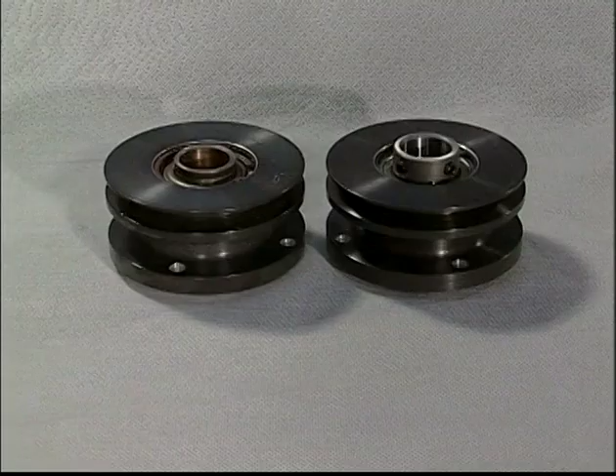Note, Rotorway International has two designs of the fan pulley assembly. Be sure to identify for the parts department which bearing you will need. For bearing replacement, do the following. Before removing the fan from the hub, make an index mark on the fan and the hub.

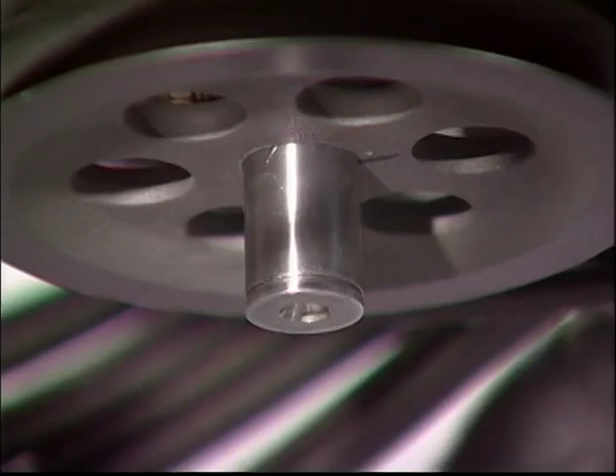Remove the lower snap ring on the secondary shaft. It will be necessary to use a puller, as the pulley was finally installed to the shaft using Loctite. Important, inspect the secondary shaft for any sign of wear or damage from the fan pulley bearing. Call customer service if you suspect shaft damage. Remove the two snap rings on each side of the bearing.

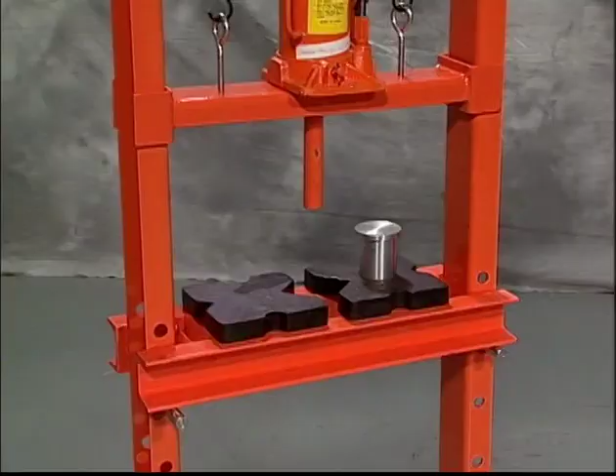Heat the pulley in an oven at 250 to 275 degrees Fahrenheit. Lightly press out the old bearing with a press.

When replacing the bearing, be sure the extended end, or the end with the two set screws, is properly positioned as shown. Clean the pulley's inner surface with acetone and then clean the new bearing. Insert the snap ring into the pulley groove and make sure it is seated.

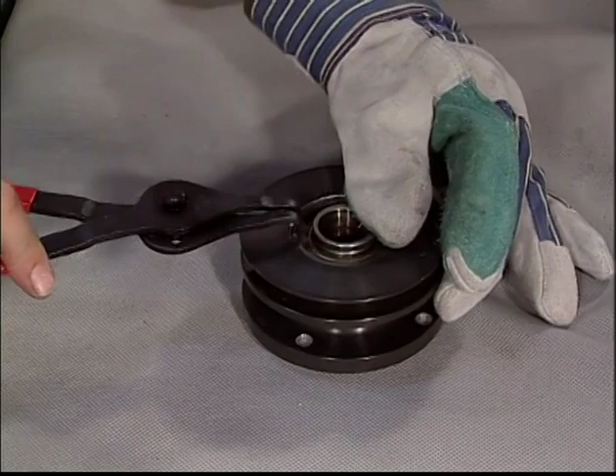Again, reheat the pulley to 250 to 275 degrees Fahrenheit. The bearing should drop into place, or lightly press into position if necessary, until the bearing contacts and sits against the snap ring. Replace the second snap ring in the pulley and let air cool. Deburr the snap ring groove on the secondary shaft.

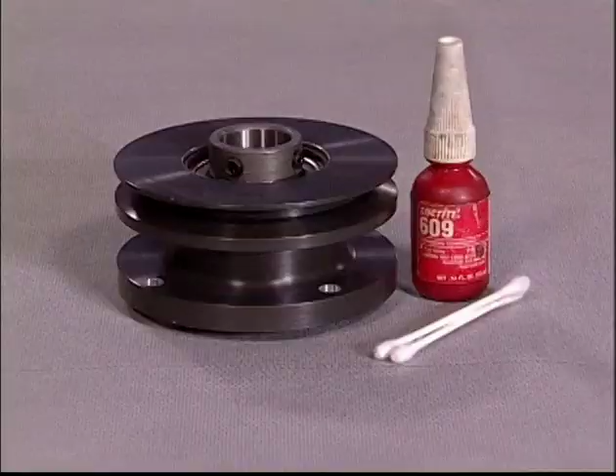Check for close tolerance fit of the fan pulley bearing against the secondary shaft. Note, use Loctite 609 upon final assembly of this part to the secondary shaft assembly.

At the 500-hour service, the main drive belts, along with the alternator, water pump, and the upper and lower fan drive belts, need to be changed out. Changing the alternator belt and upper fan drive belt requires removal of the secondary from the square tubes of the airframe. Before removing the secondary, remove the rear oil bath seal as shown in the 100-hour maintenance video series, Tape 2. Note the oil bath's lower pan has been removed during this portion of the video for a better view of this procedure.

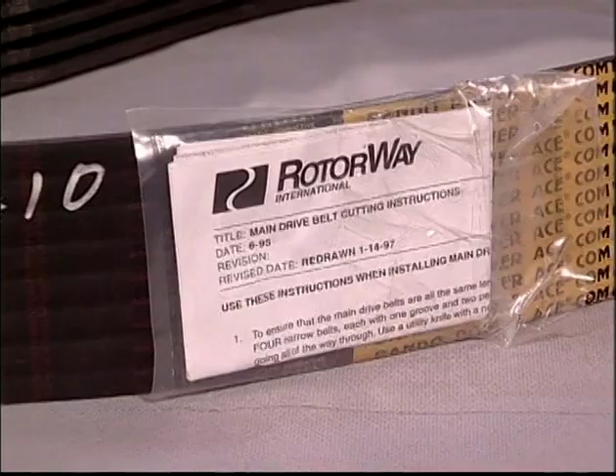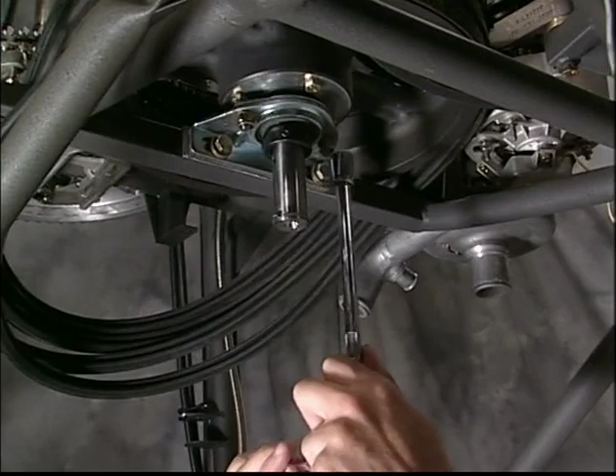Refer to the instructions accompanying the new main drive belts and prepare them for installation. Be sure and clean the belts thoroughly before installation. Loosen the belts of the alternator and fan drive. Remove the fan countershaft drive assembly from the airframe. Remove the lock nuts of the secondary's lower bearing flange.

Remove the bolts that secure the flange to the frame, keeping the shims and the flange together. Remove the bolts of the upper bearing assembly and remove the secondary from the airframe. Keep the shims together.

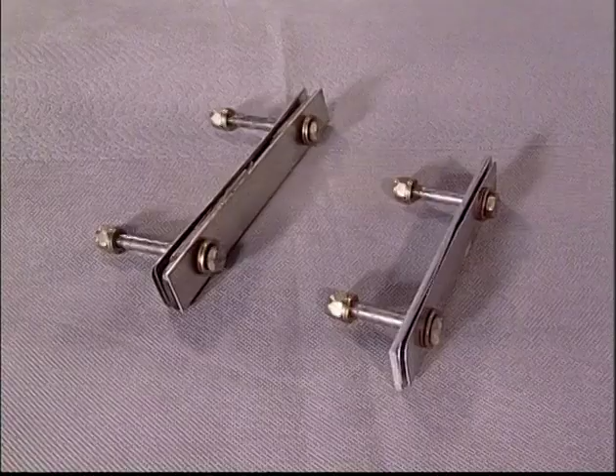Note, it is very important, maintain the order and number of shims for the bearing assemblies. Inspect the condition of the secondary pulley. Clean any grease and dirt from the top surface of the upper bearing. Replace the bearing temperature strip if faded or damaged from moisture and age. Warning, do not tamper with the secondary unit. This is a factory serviceable unit only.

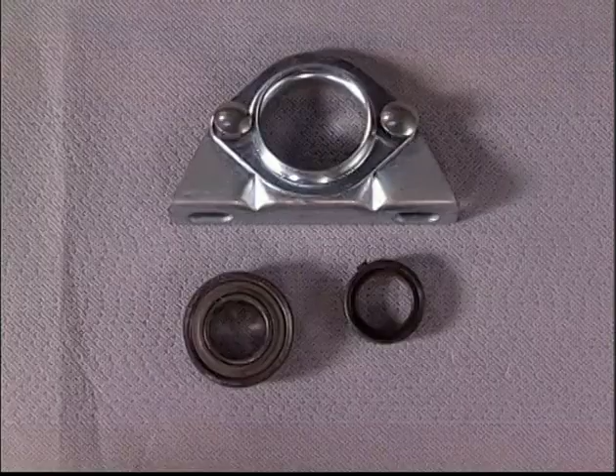Replace the lower secondary bearing assembly. Replace the fan drive shaft bearings. Replace the idler pulley bearing. Heat the idler pulley bearing in an oven, as demonstrated with other bearing replacement procedures. After new bearing installation, always verify that the bearing was installed correctly by rotating the pulley or bearing on the shaft and check that it turns smooth and its alignment is correct.

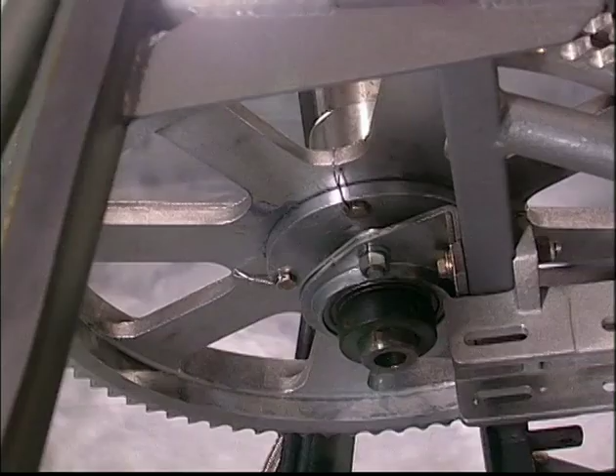The lower main shaft bearing RCO is 500 hours. Also, these four 1/4 inch bolts and the lock nuts need to be replaced at the 500-hour service interval. To replace the 1/4 inch bolts on the main sprocket, it may be possible to raise the sprocket up the shaft to access the bolt heads as shown.

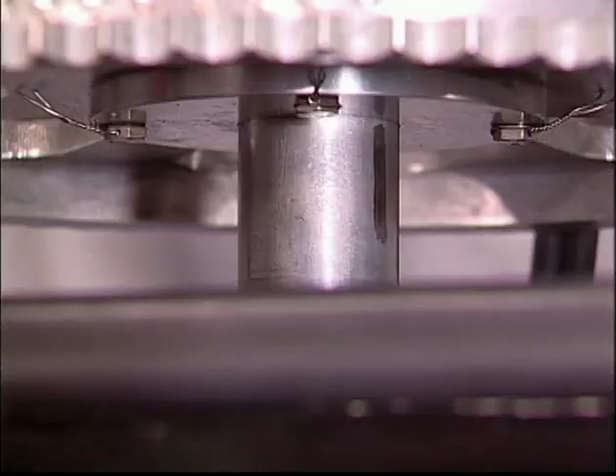To replace the lower main bearing, refer to the steps shown next during the main shaft raising or removal procedures. Note, it is not necessary to raise or remove the shaft to change the lower bearing. Should you find it necessary, it is also possible to raise or remove the main shaft without disturbing the rigging of the swash plate. Proceed as follows.

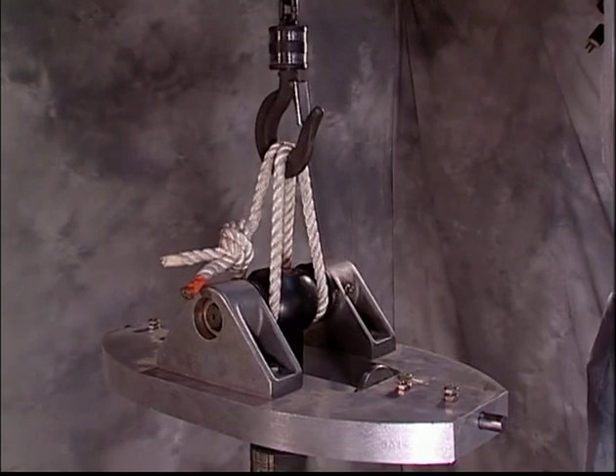Level the main shaft fore and aft, using blocks of wood under the skids. Then use a hoist to support the weight of the shaft before servicing the lower main shaft bearing. Adjust so there is a slight lifting tension. Loosen the four 3/8 inch bolts securing the main thrust bearing flanges to the hood bracket, approximately one full turn.

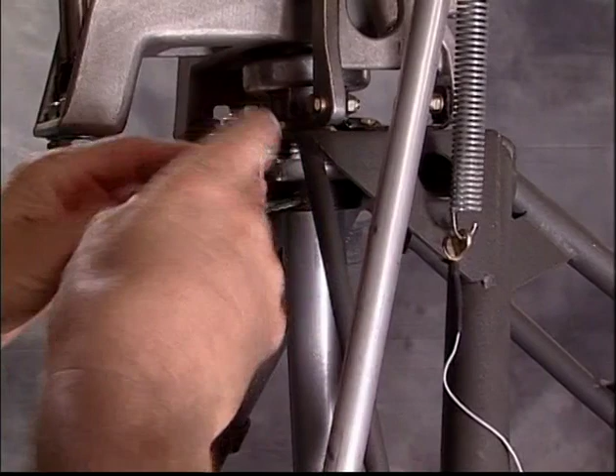Remove the safety spacer and clean the grease from the shaft. Loosen the set screw on the main thrust bearing lock ring and knock the ring loose from the bearing. Deburr the shaft. Make absolutely sure there are no marks or burrs on the shaft. Any burrs could damage the main thrust bearing, or the shaft could jam the bearing, making removal virtually impossible.

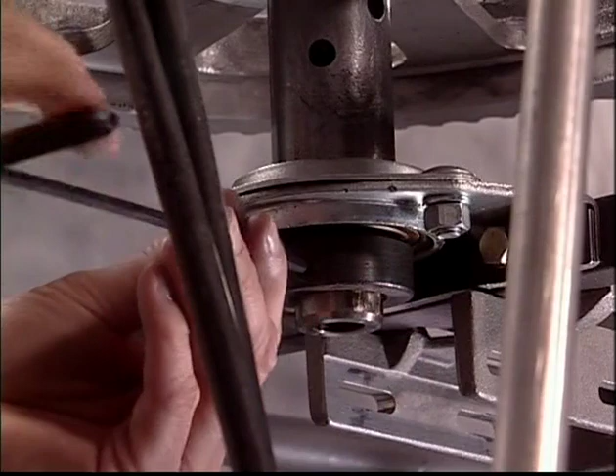Cut the safety wire and remove the 3/8" bolts. Before removing the last bolt, make an index mark on the hub and the shaft. Loosen the set screw on the lower shaft lock ring and knock the ring loose from the bearing and shaft.

Remove the nuts and lock washers from the lower bearing flanges. Remove the bolts that secure the bearing flange and the upper engine mount to the airframe. Allow the shaft and bearing assembly to move away from the airframe slightly to remove the lower flange.

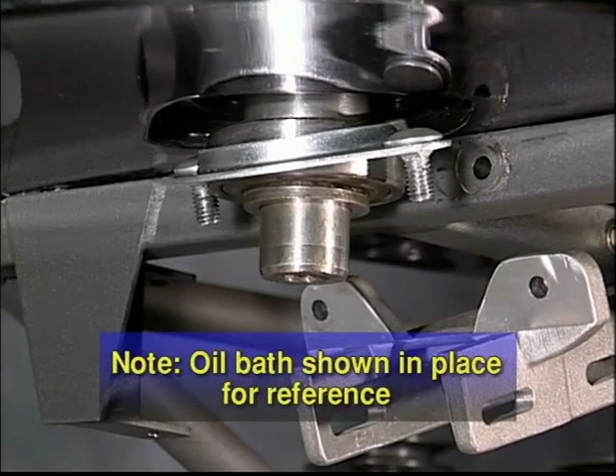Deburr the shaft and clean it with acetone. Now lower the main shaft assembly to move the bearing down and away from the oil bath. Install a puller and apply pressure to the bearing.

Because of the Loctite 609 used on final assembly, it will be necessary to use heat to free the bearing from the shaft. Use caution when applying heat. Only heat the inner race of the bearing. Do not apply heat directly to the shaft. Clean the shaft with acetone.

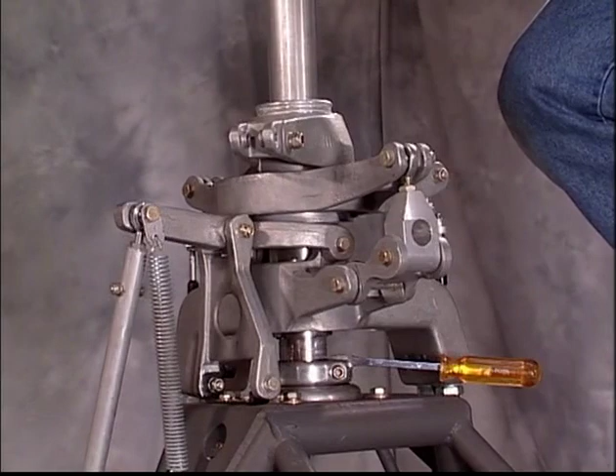These 4 bolts and lock nuts in the large sprocket need to be replaced. The bolts, part number E00-2450, and lock nuts, E00-3410, are included in the 500-hour service kit. Cut the safety wire and remove and replace 1 bolt at a time.

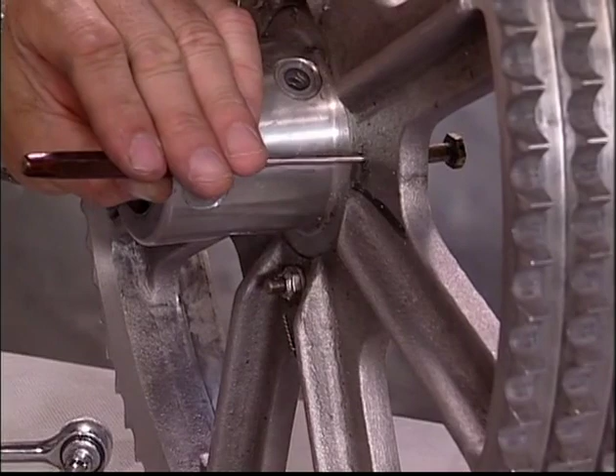Carefully inspect each bolt and bolt hole for any signs of wear. Remember, these bolts should have a tight fit. If the new bolts go in too easily or there are some other indications of wear, contact Rotorway customer service.

Retorque the bolts to 7 foot-pounds. Use the same number of washers under the nuts as the original bolts, making sure the lock nuts do not bottom out on the threads. Safety wire the bolt heads to the sprocket before reinstalling the shaft.

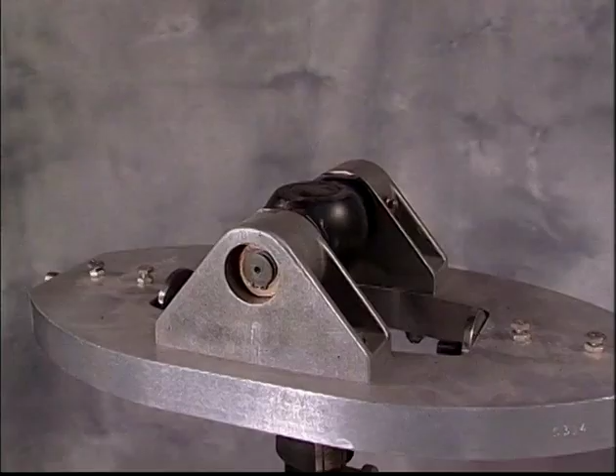Inspect and clean the main rotor shaft before reinstalling. Inspect the boot and replace if necessary. Inspect and clean the main thrust bearing. Replace if necessary. Note the 500-hour service requires the teeter block bearings be changed out in addition to the 3/4 inch main drive pin and shim kit.

Refer to the Rotor Hub 100-hour service in the Maintenance Video Series Tape 3 for these inspections and disassembly procedures. While the main rotor shaft is out of the helicopter, you might find it easier to service the Rotor Hub for the 100, 250, and 500-hour RCO parts. Remove the grease fittings.

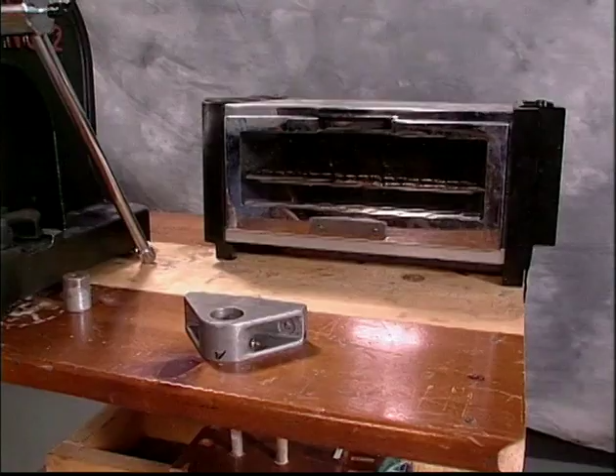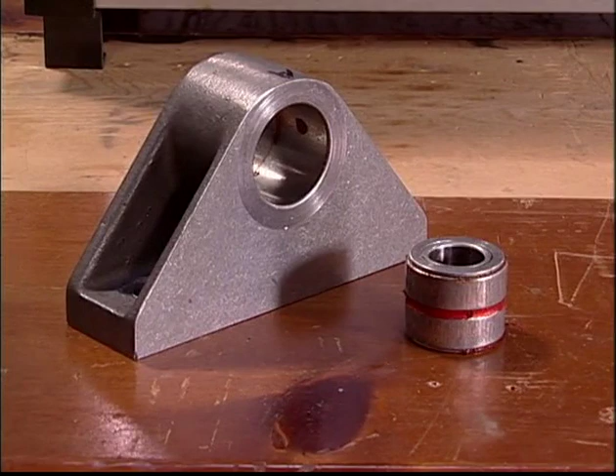Heat the teeter blocks in an oven set at 275 degrees. Use a press to remove the bearings. Clean the teeter blocks with acetone. Heat the teeter blocks again to 275 degrees. Apply Loctite 609 to the new bearing.

Use a 5/1000 piece of shim stock or a tool with 5/1000 rise as shown to press the bearing within 5/1000 of the machined or the inside face of the teeter block. Do not allow the bearing to be flush against the surface of the teeter block.

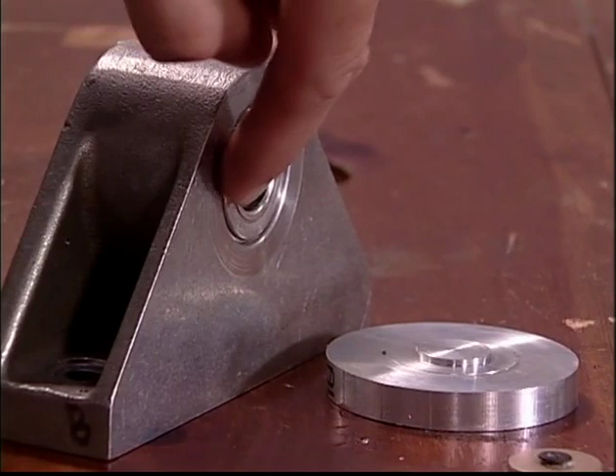Reinstall the main shaft and rotor hub, reversing the removal procedure shown earlier. Reinstall the sprocket hub bolts and torque. Safety wire the bolt heads to each other. Safety wire the shanks of the 3/8" bolts to each other. Finally, install the lower bearing to the shaft with Loctite 609 and allow to set. Then set the upper and lower lock rings to the bearings as shown in the construction manual and video.

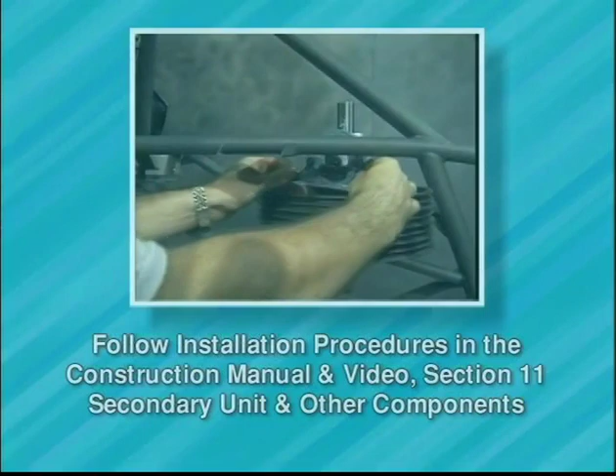Follow the installation procedures in the construction manual and video, beginning with the Section 11 drive system for the reinstallation of the secondary unit and the other components. Reinstall the engine as shown in the construction manual and video, Section 12. Follow the new belt tensioning procedure shown in the construction manual and video.

After performing the 500-hour service on your helicopter, it is a good and safe practice to perform an inspection similar to the new aircraft inspection. Using the same checklist to verify and check all of the alignments and riggings will allow you to double-check everything. It is also a good practice to tie the helicopter down for its first run-ups after servicing the main rotor blades, hub, and swash plate.

This concludes the 500-hour service. Remember to include the 25, 50, 100, and 250-hour service procedures with a 500-hour interval. Note the following maintenance items are to be performed every 1,000 hours. In addition to the 1,000-hour parts, you will need the 500-hour service kit, which includes all the parts for 100 and 250-hour recommended changeouts. Call the Rotorway Parts Department for more information.

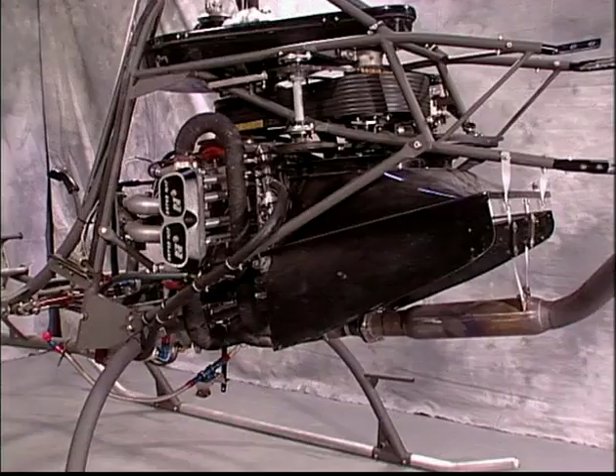Because of the number of inspections and part changes at the 1,000-hour service, you may find it easier to remove all the body panels, windscreen, and the tub. The RI-162F engine at 1,000 hours requires a complete engine overhaul. This is a critical and complex task.

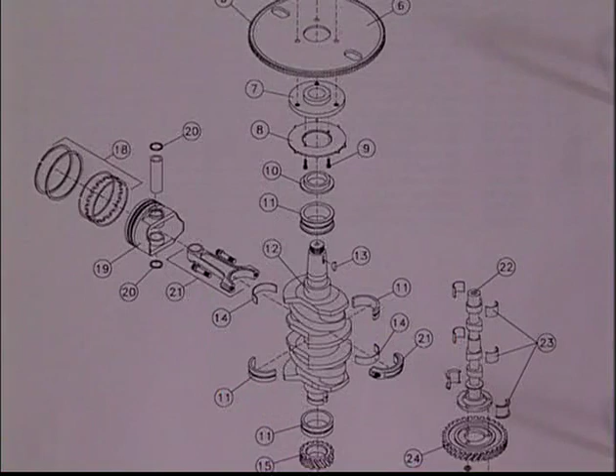It is recommended that this service be performed only by the Rotorway Service Center and not by anyone else, even if they are familiar with all the aspects of internal engine overhaul. However, specifications have been given to perform this service, and all the necessary parts are available from the factory. Call Rotorway Customer Service for more information.

To remove the engine for the 1,000-hour overhaul, proceed as follows. Disconnect the leads from the battery terminal. Remove the heat shielding. Remove or support the tail boom. Drain the coolant from the system.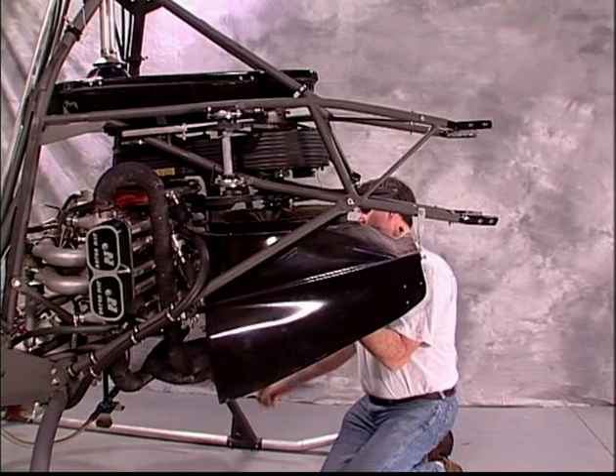Drain the oil from the engine and sump. Remove the muffler and tailpipe. Remove the radiator and fan shroud. Index the fan to the hub and remove the 4 bolts that hold the fan to the hub. Remove the tail boom support braces.

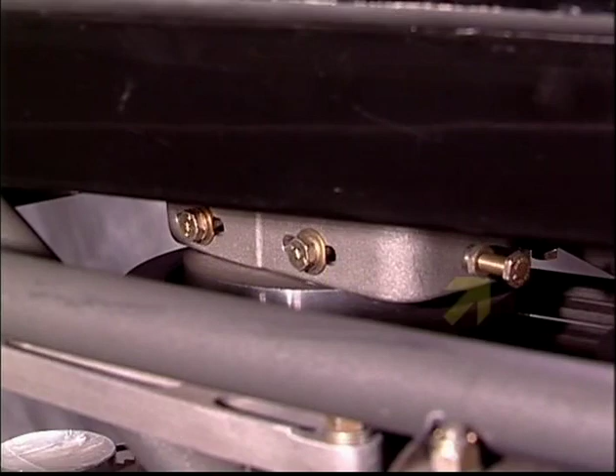Loosen the top engine mount bolts. Loosen the all-thread bolt on the upper engine mount clevis to release the tension on the drive belts. Remove the clutch tube weldment and idler pulley. Remove the exhaust manifold assembly.

Disconnect all of the fuel lines and cap them to prevent contamination. Disconnect the oil lines and cap them. Disconnect all the coolant lines and cap them. Disconnect all electrical and FADEC connectors from the engine.

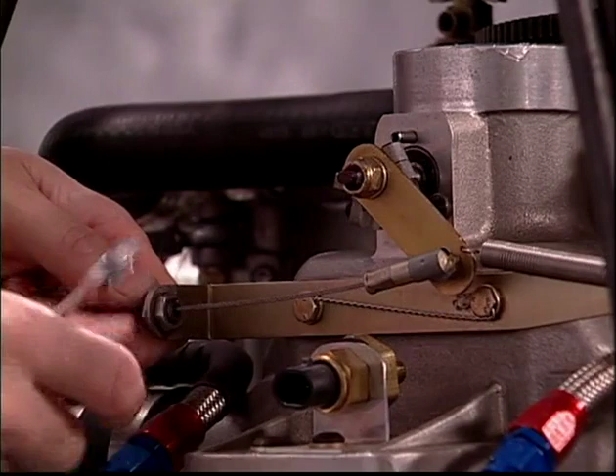Disconnect the manifold pressure tubes from the intake manifold. Disconnect the throttle cable from the intake manifold. Disconnect the spark plug wires. Remove the bolt that fastens the torque link to the engine.

Use a jack to support the weight of the engine. With jack in place, remove the three 5/16" bolts from the lower engine mount and carefully lower the engine out and away from the airframe.

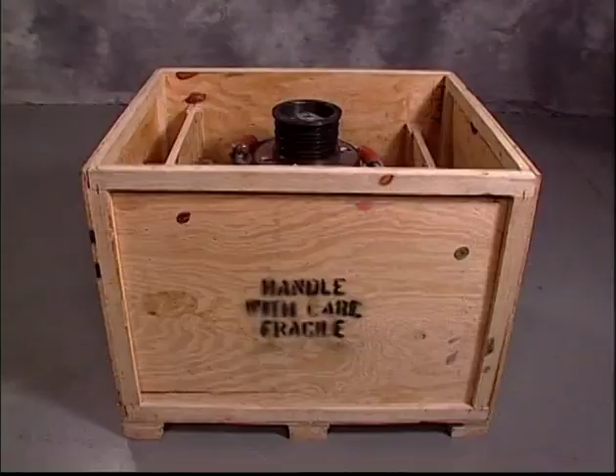Plug or cover all of the ports and use your original engine shipping crate to ship the engine back to Rotorway. Call Rotorway's customer service for more information and scheduling services. After service, reinstall the engine as per the construction manual and video section 12.

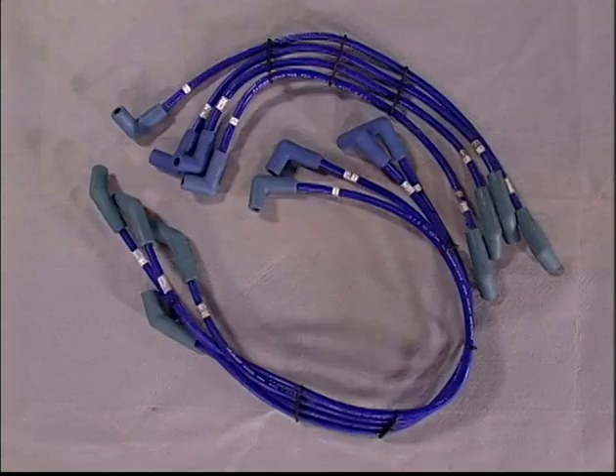The spark plug wires need to be replaced at 1,000-hour service interval. Note, only use spark plug wires from Rotorway International. Do not substitute with any other spark plug wires. Follow the instructions in the construction manual and video for spark plug wire installation.

The engine pulley is on condition or an RCO of 1,000 hours and can be replaced by Rotorway during the engine overhaul. The 5/16" male rod end of the torque link must be changed at the 1,000-hour service interval.

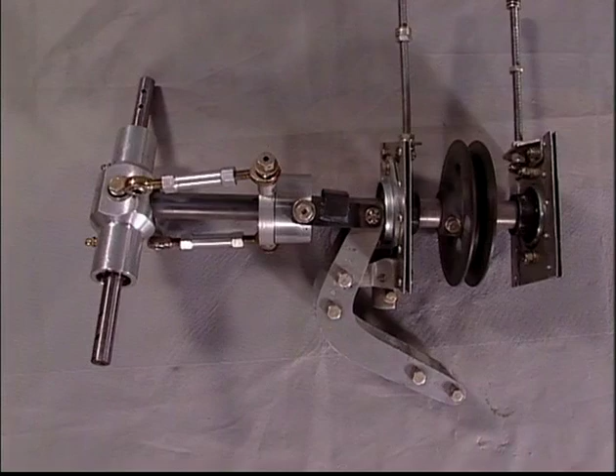The 1,000-hour service requires change-out of the following tail rotor parts. They are the carriage slider assembly E17-6125, the male rod ends E17-1210, and the female rod end E16-1200. Refer to the 250 and 500-hour tail rotor procedures and include these parts as you perform the service.

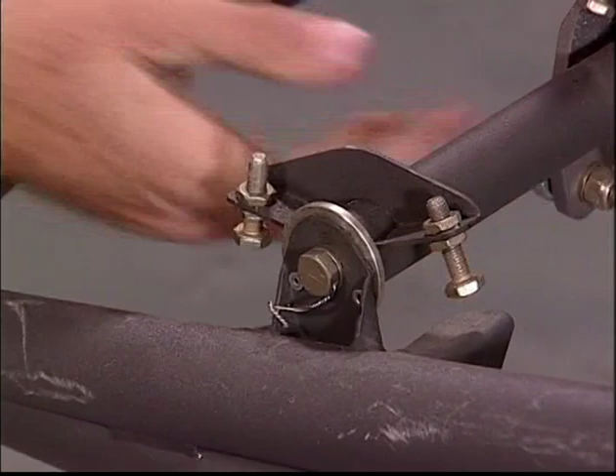The cross-shaft bushing of all the helicopter's control assemblies must be checked for their proper end play. The bushings are RCO at 2,000 hours and must be inspected at the 1,000-hour service interval. If you find the nylon bushing and aluminum bushing have too much end play or the parts seem to be binding, disassemble and replace the parts.

The 1,000-hour service requires the following parts to be changed in the directional control assembly. The 3/16" female rod end of the directional cable and the 1/4" male and female rod ends of the directional scissors are to be replaced at the 1,000-hour service interval. Remove the 3/16" bolt securing the rod end to the scissors, and loosen the jam nut.

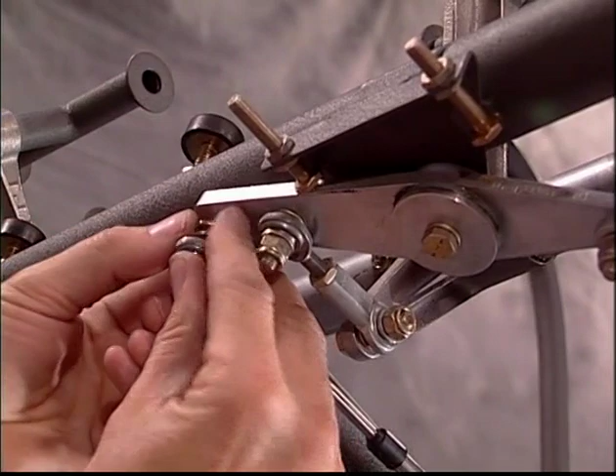Then count the number of turns to remove and install the new rod end with the same number of turns. Tighten the locking nut, replace the bolt, and verify the cable travel.

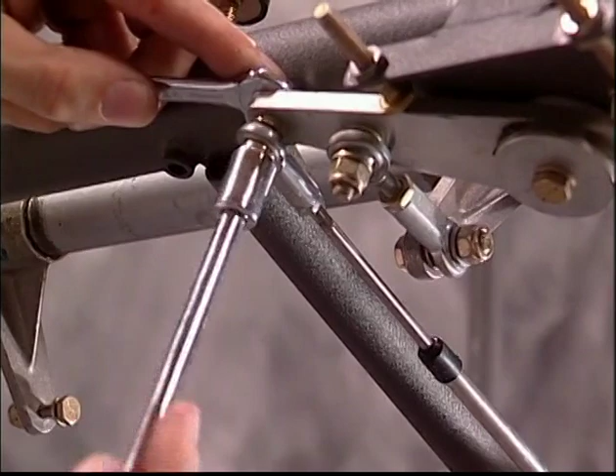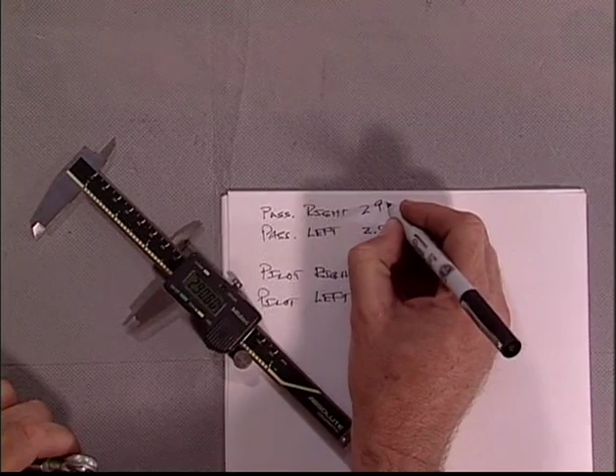Remove the bolts to remove both rod ends. Using calipers, measure and note the distance. Replace the new rod end with the same measurement.

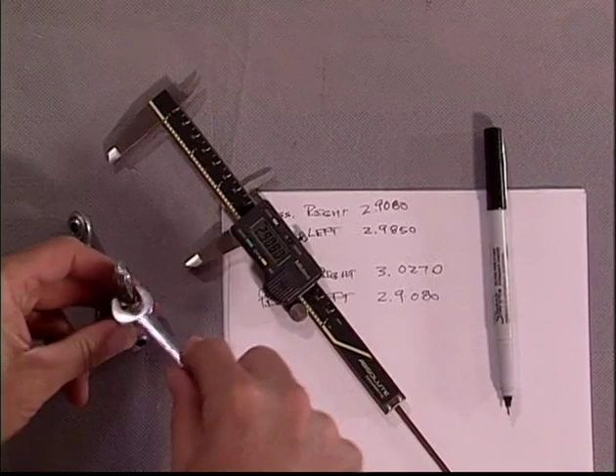Remove the scissors mount bushing by removing the bolt. Lower the bushing away from the scissors beam. The scissors mount bushing is RCO at 2,000 hours. Check for proper end play.

Clean, grease lightly, and reassemble. Refer to the construction manual and video section 10 for detailed procedures.

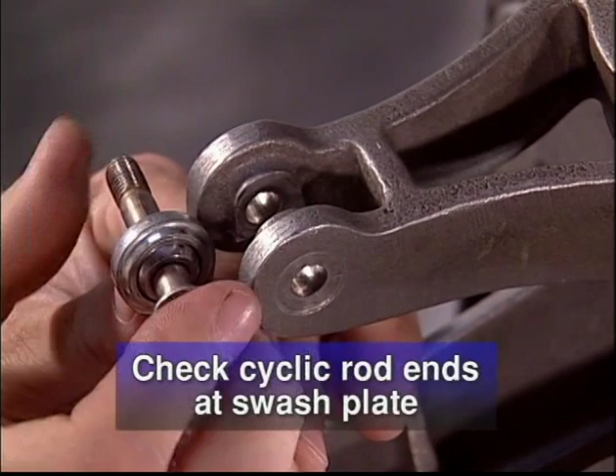Check the cyclic's lateral nylon pivot bushing. Remove the bolt and the two large fender washers. Replace a small amount of grease, Mystik JT-6, on the bolt, bushing, and mating surfaces.

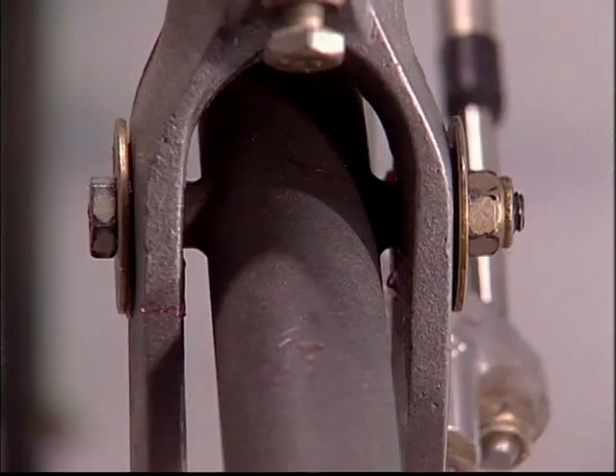Reinstall the bolt and 2 fender washers. Remember, this bolt has a tight fit. Tighten the bolt enough to hold firmly while still allowing the cyclic clevis to move easily without any end play. Caution, under no conditions should any grease or lubricant be used on the sliding inner cable of the cyclic's control.

Note, the male rod ends of the collective control rod are 2,000 hour RCO. However, if you need to replace the rod ends on condition, follow this procedure to maintain the proper rigging. Unhook the spring. Remove the bolt that holds the rod end to the collective actuator fork.

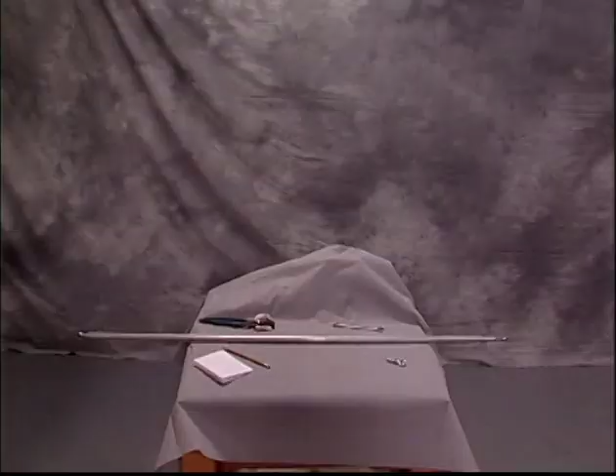Remove and inspect the rod end spacers and spring bracket for wear and corrosion. Remove bolt from the G control arm. Remove the collective control rod from the helicopter. Before removing, measure the distance between the rod ends and remove the old rod ends from the collective control rod, counting the number of turns it takes to remove them.

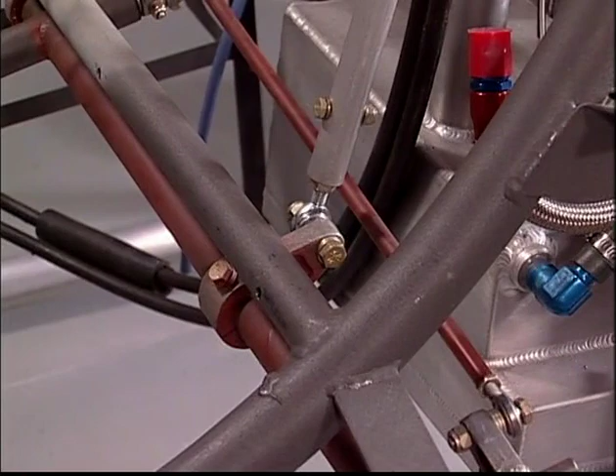Reinstall the new rod ends using the same number of turns, then confirm this position with the original measurement. Reconnect the lower rod end first and torque the bolt. Then reassemble the spring bracket, rod end spacers, and rod end to the hole in the actuator fork. Torque the bolt. Make sure rod end lock nuts are firmly in place.

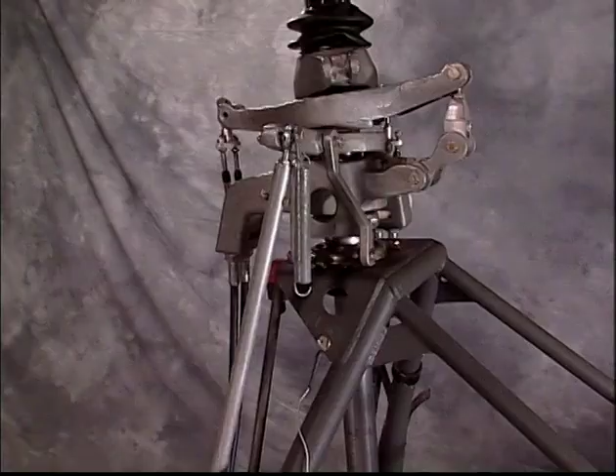Reconfirm collective pitch setting by reviewing collective rigging procedures in the Construction Manual and Video Section 25. Inspect and verify the operation of the throttle shaft assembly. The rod ends are RCO'd at 2,000 hours or on condition. Replace as necessary. When reinstalling the throttle shaft, lightly grease the shaft where the nylon bushing makes contact.

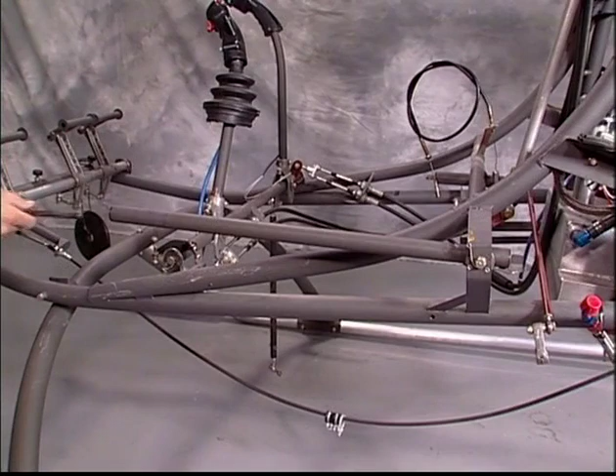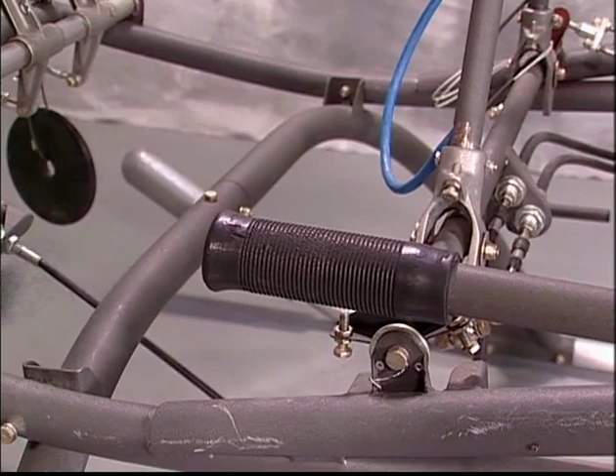Reinstall the washer and the B control arm in their respective positions. Reinstall the bolt in the control arm casting and torque. Note, when replacing the grip, do not cut off any length of the rubber grip. The part of the grip that extends past the throttle shaft handle and onto the non-rotating parts of the collective stick will help act as a friction lock for the throttle.

Rotorway International has used two types of steel-braided hoses for the Exec 162F helicopter. The earlier models incorporated rubber-lined steel-braided hose assemblies for the fuel system. They usually did not have a part number tag and were a larger size outside diameter. The later models used Teflon-lined steel-braided hose assemblies. These hoses have a tag which identifies the Rotorway part number and TSO information. They are usually smaller in outside diameter.

It is important to note that the recommended changeout times are different. The rubber-lined hoses are on condition, 1,000 hour or 5 years. The Teflon-lined hoses are on condition or 2,000 hour. After initial installation and use, the Teflon-lined fuel hoses have a tendency to set. Never attempt to straighten or reconfigure a set hose, as it will crack.

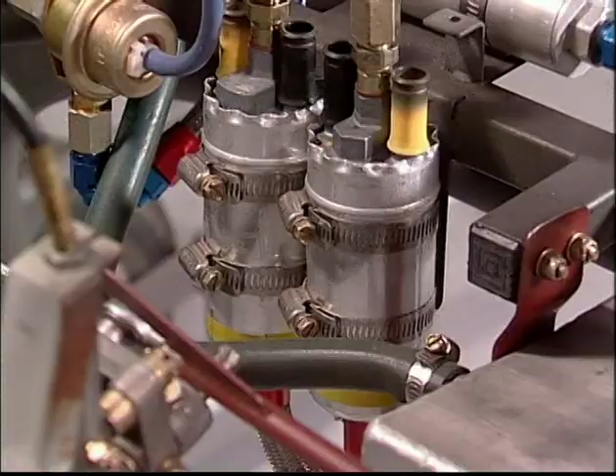The two fuel pumps are to be replaced at the 1,000 hour service interval. Reference the construction manual and construction video, section 20, for installation instructions. The fuel pressure regulator is RCO'd at 1,000 hours. The fuel injectors are to be replaced at the 1,000 hour service. This can be included in the engine overhaul. However, should you detect a problem with an injector or need to replace one before the engine overhaul, follow these procedures. Normally, there is no maintenance required on the fuel injectors.

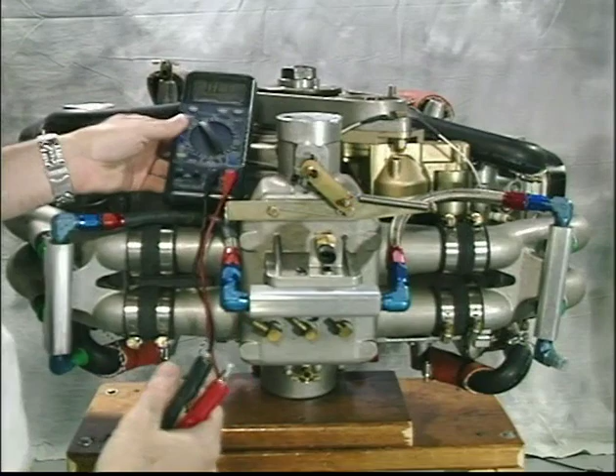Note, the primary and secondary injectors of the Exec 162F helicopter have different internal resistances and flow different amounts of fuel. Use an ohm meter to measure the resistance between the two terminals of the injector. Compare this value against the injector's specified resistance located in the engine manual. Rotorway recommends replacing an injector if the resistance reading is incorrect and you suspect that it is not properly delivering fuel. Comprehensive testing and cleaning of the injectors can only be accomplished using special equipment. The flow rate and spray pattern must be measured and analyzed to determine if the injector is performing according to specifications. To remove the fuel injector, proceed as follows.

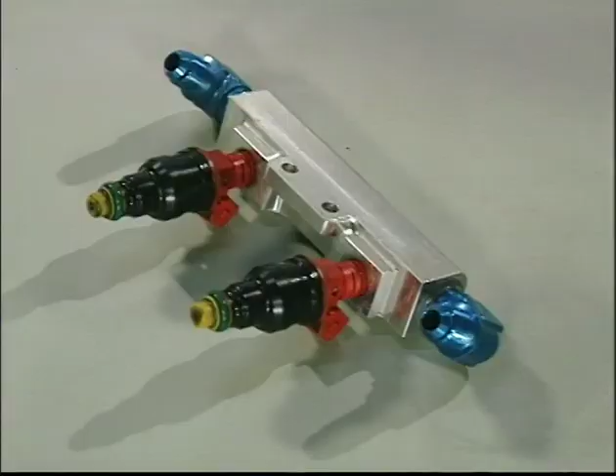Carefully bleed off the fuel pressure and drain the fuel from the fuel rail assembly. Disconnect both fuel lines from the fuel rail and remove the retention bolts. Withdraw the parts collectively by moving them from side to side while pulling the injectors out of the intake manifold, or the plenum if removing the secondary injectors. Carefully remove the injectors from the fuel rail with the same wiggling motion. If an injector is being reused, the O-rings must be replaced. These bores must have a good finish and be free of scratches.

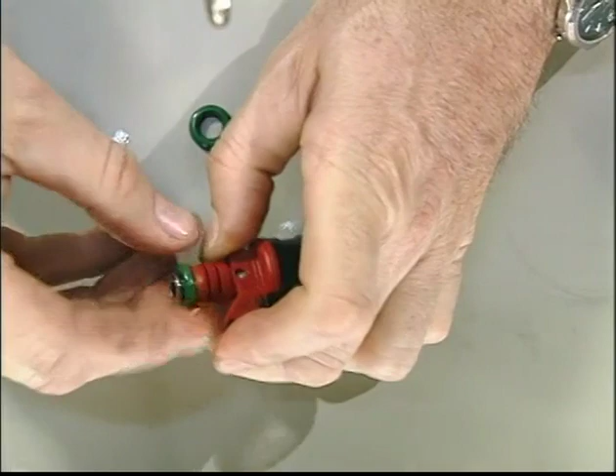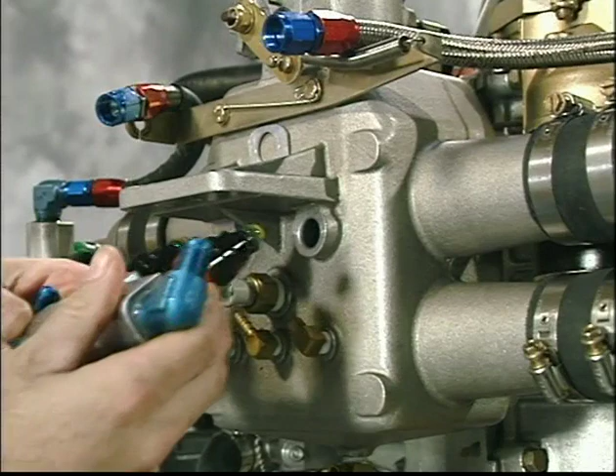Before installing the injectors, apply a light film of engine oil to the O-rings and to the bores into which the injectors will be inserted. Install both injectors into the fuel rail by pushing them into the bores while wiggling them from side to side. Install this assembly into the appropriate plenum or intake manifold bores using the same wiggling motion.

Install and lightly snug the retention bolts. The fuel rail bolt holes are large enough to allow adjustment of the final mounting position. The alignment of the injectors must not be binding. Once this alignment is correct, torque the bolts. Safety wire the bolts in the primary injectors. Reconnect the fuel lines and perform a pressure check to test for leaks.

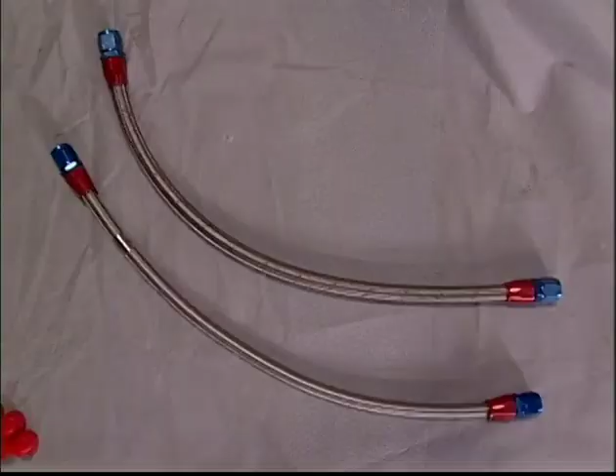As with the fuel system, Rotorway International has used two types of steel-braided hoses for the Exec 162F helicopter. The earlier models incorporated rubber-lined steel-braided hose assemblies for the oil system. They usually did not have a part number tag and were a larger size outside diameter. The later models used Teflon-lined steel-braided hose assemblies. These hoses have a tag which identifies the Rotorway part number and TSO information. They are usually smaller in outside diameter.

It is important to note that the recommended change-out times are different. The rubber-lined hoses are on condition, 1,000 hour or 5 years. The Teflon-lined hoses are on condition or 2,000 hour. The springs on the exhaust knuckle must be replaced at 1,000 hours.

The secondary assembly of the drivetrain will need to be removed from the helicopter and returned to Rotorway Service Center for 1,000-hour service. Refer to the 500-hour service interval for secondary removal procedures. The 1,000-hour service interval requires inspection and servicing the upper bearing assembly and shaft. Call Rotorway Customer Service for more information and scheduling.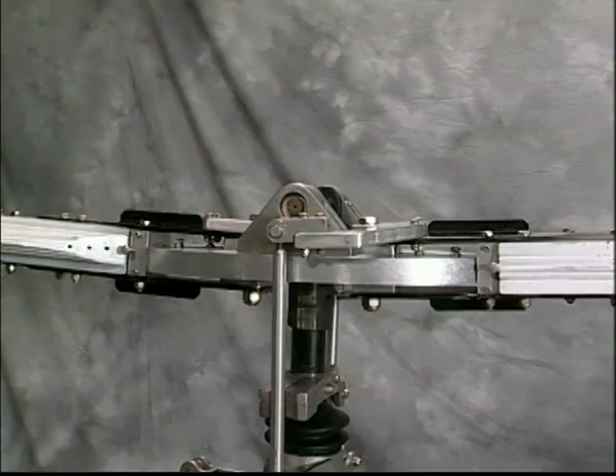The rotor hub components that must be replaced at 1,000-hour RCO are the rotor hub plate, teeter block assemblies, thin washers, rod ends, and pitch links. At 1,000 hours, the swash plate assembly should be returned to Rotorway for service. The collective slider ball, spherical bushing, and slider ball O-ring are factory serviceable items and need to be replaced. Contact Rotorway Customer Service Center for information regarding the factory service of rotor hub and swash plate assembly.

The main shaft is an on-condition or 1,000-hour RCO. For the 1,000-hour service, you will also need to replace the following components: the main sprocket hub, main thrust bearing and flange, and main safety spacer. To service the rotor hub, swash plate, and the main rotor shaft, remove the assembly from the helicopter. Loosen the 4 bearing flange bolts 1 full turn.

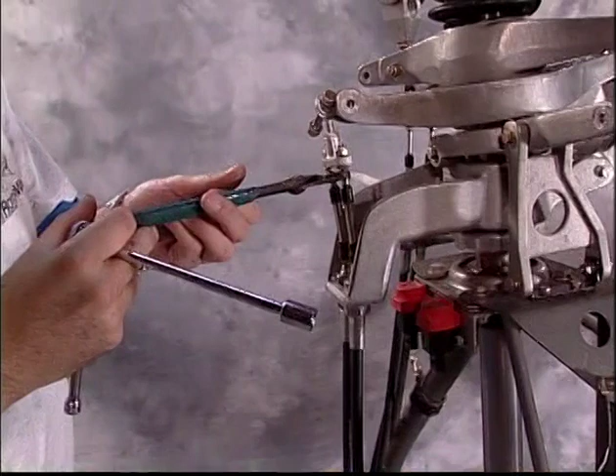Disconnect the cyclic and collective control assemblies from the main shaft assembly. Remove the bolts that hold the collective actuator fork to the hood bracket. Remove the safety spacer from the main shaft. Loosen the set screw on the main thrust bearing lock ring. Knock the lock ring loose with a hammer and punch.

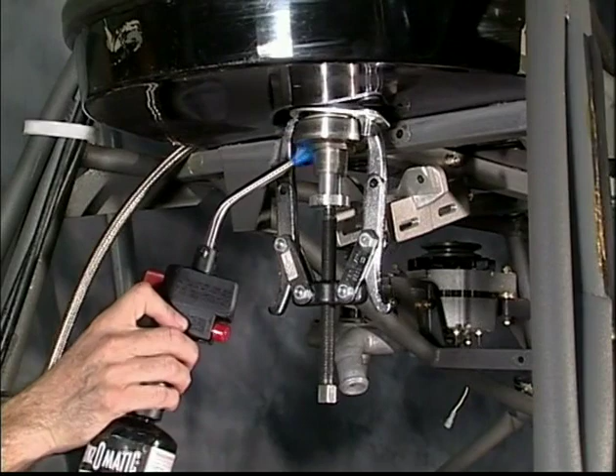Note, make sure and file the upper lock ring burrs and check for any other burrs on the shaft before attempting to raise the main shaft through the main thrust bearing. Do the same to the lower bearing lock ring. Remove the lower main shaft bearing. Remove the burrs before pulling the bearing from the shaft. This bearing and shaft use Loctite during the final construction procedures. It will be necessary to use a puller and some heat to break the bearing free of the shaft.

Remove safety wire and the 3 main sprocket bolts. Be sure the sprocket hub turns freely on the shaft. Level the skids of the helicopter, then position a hoist to lift the assembly from the helicopter.

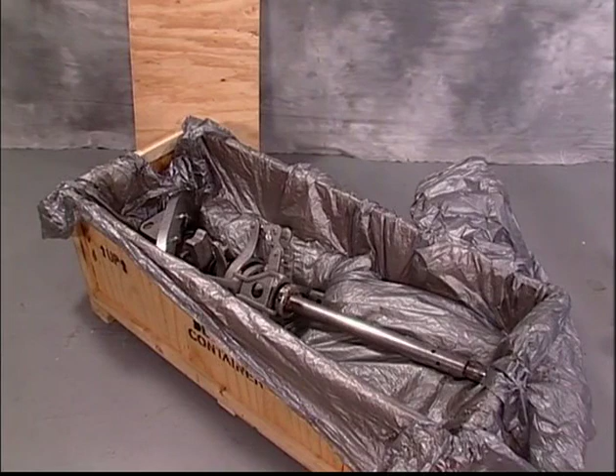The builder, owner, can return the main rotor shaft assembly in its original crate to Rotorway International for factory service. They will provide a new shaft, hub plate, teeter blocks, and hardware with the shaft centered and shimmed to the hub plate while servicing the swash plate assembly. As an option, the swash plate can be removed from the main rotor shaft assembly for factory service by Rotorway.

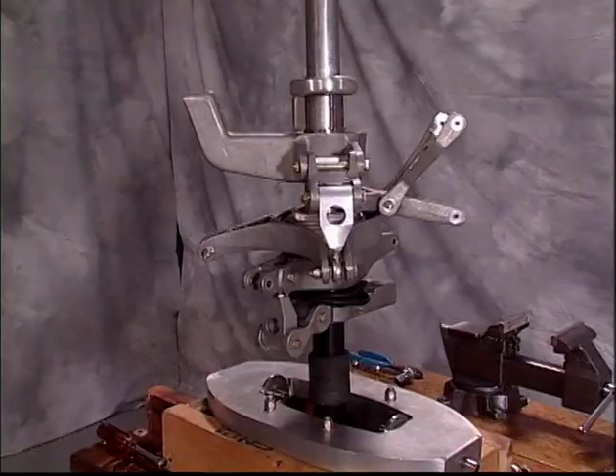Fabricate a wood frame to assist holding the main shaft assembly, inverted as shown. Measure the distance from the shoulder of the end of the shaft to the bottom of the slider ring clamp. It should measure approximately 18 7/8 inches. Loosen the bolt on the slider lock ring. Remove the bolt that holds the male rod end of the counterweight to the swash plate.

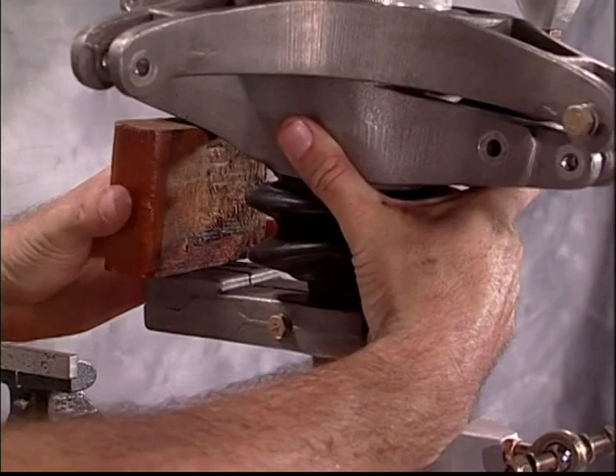Cut the lower wire tie to free the boot from the swash plate assembly. Carefully slide the swash plate assembly off the shaft. Cut the upper wire tie of the boot and slide the boot off the shaft.

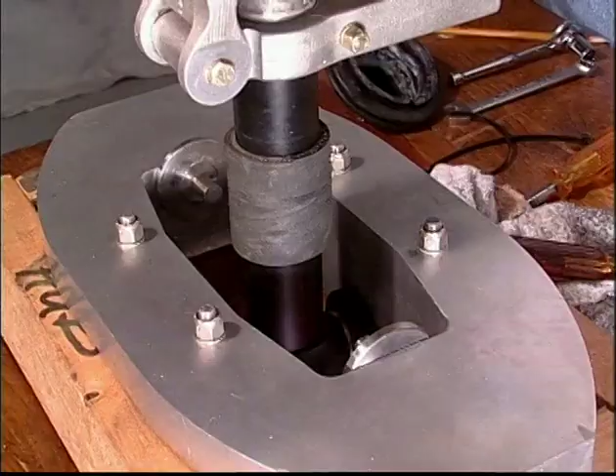Measure the distance from the shoulder of the shaft knuckle to the top of the counterweight. It should measure approximately 6 7/8 inches. Loosen the bolt locking the counterweight to the shaft. Lightly tap a flat blade screwdriver in the split of the counterweight and slide it off the shaft.

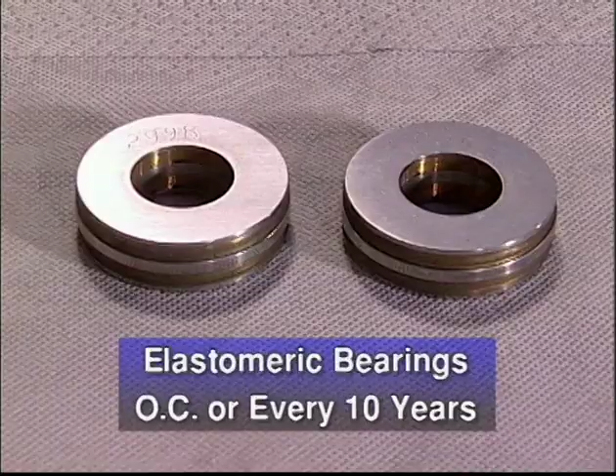The master and slave thrust blocks are RCO'd at 2,000 hours or on condition. When ordering the new shaft and rotor hub parts, call Rotorway's customer service for more information regarding the matching of your thrust blocks to the new hub plate. The elastomeric bearings are on condition or replaced every 10 years. If you are replacing parts and reassembling the rotor hub assembly, refer to the rotor hub inspection and rotor hub shimming procedures in the Maintenance Video Series 100-hour rotor hub section.

The 9/16" bolt, 9/16" nut, aligner block assembly, and aligner block bolts must be replaced at 1,000 hours. Reference the construction manual, prints, and construction video, section 24, for installation procedures. The Rotorway International manufactured rotor blades have an RCO of 1,500 hours or are changed on condition. Refer to the 25-hour service section of the Maintenance Video Series regarding inspection and blade fatigue.

The retention strap assemblies, retention strap bolts, tip weights, pitch horn clevis, and pitch horns of both main rotor blades must be replaced at 1,500 hours. Refer to the construction manual and video, section 24, main rotor blades, when constructing new replacement blades and parts.